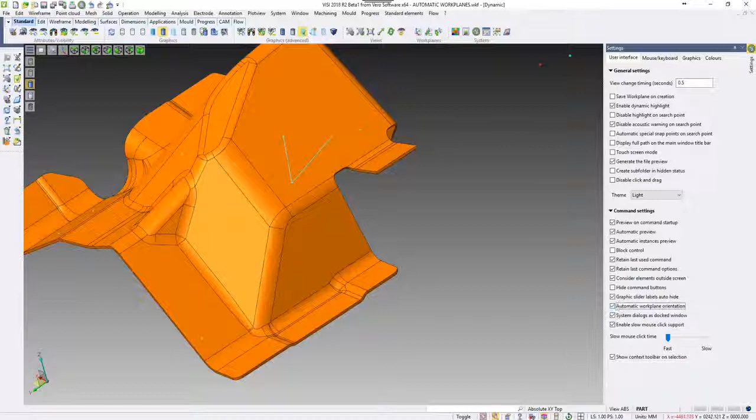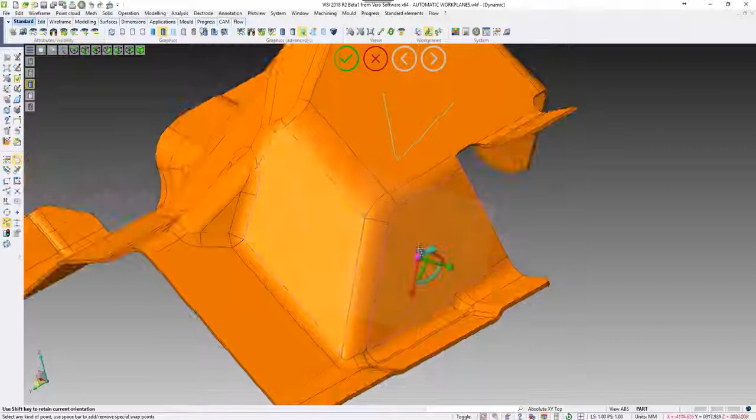So if we come and create a new work plane, you'll see as I move the cursor about, the origin will start orientating automatically depending on where I've got the cursor on the model. And if I pick on an edge of the model, you can see the x-axis snaps to follow the edge that I'm running the cursor over. And then if I place or select a point, it positions the origin.

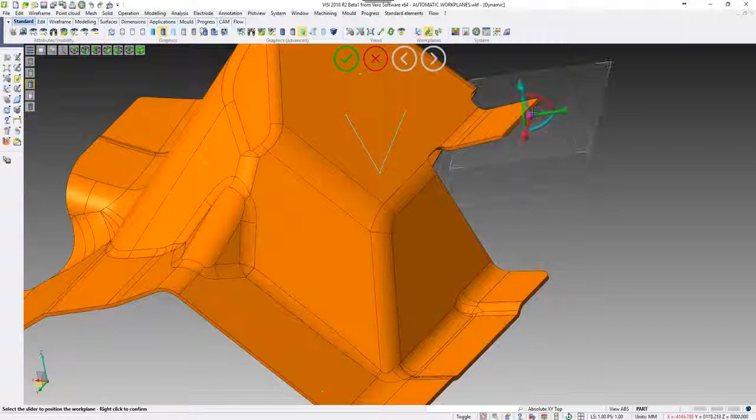I can then adjust it more by sliding the sliders, so the position sliders and the rotational sliders. So you've got a full range of adjustment there. And then if you move the cursor by dragging the center sphere to another position, you can move it to a brand new position altogether.

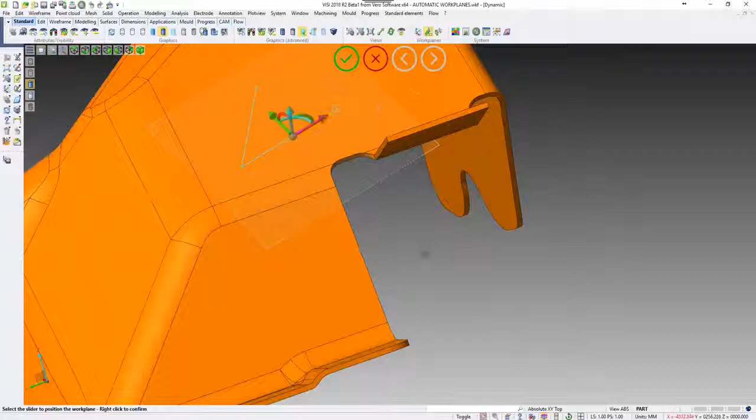So if I create a new origin, if I pick a line now that's actually on that face, you can see the X snaps to that edge. And if I press Alt and then grab one of the arrows, you can see I can actually rotate that to match a different position. So, and then move it just by dragging a slider.

So if I come over to here and create some other work planes, if I snap to an existing saved work plane, you'll see that the new automatic work plane will automatically snap to match that origin.

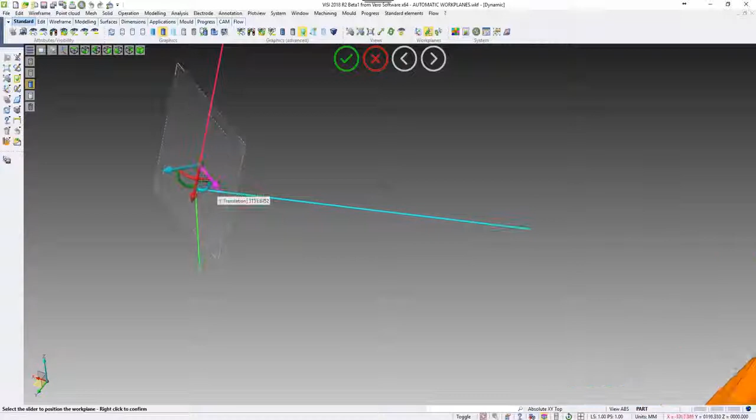Now I've got 3 lines here. What I'm going to do is create an origin to match the orientation. So I click on a line, snaps the X, but then the other origins are in the wrong position. So I'm pressing the Alt key now to be able to reorientate the X, Y and Z to match the correct orientation, and then just hit the tick, which saves that as a temporary work plane.

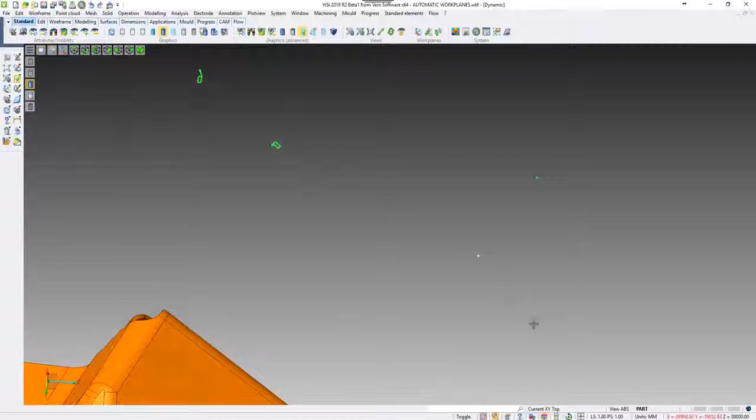So I've got 3 points now, so I've got no line elements. So the system won't automatically orientate, but if I pick on one of the points and then again use this Alt key, press the Alt key down, keep it selected, grab the arrows, and then with the Alt key selected, can just rotate them, which just locks the position of the origin, and I can match up the points and get the X, Y, Z where I want them.

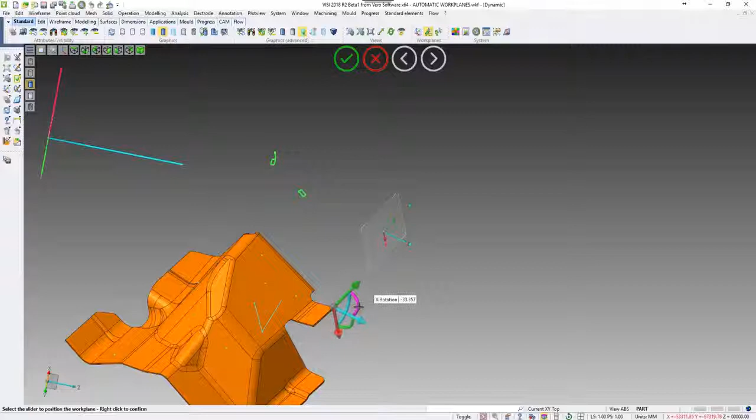And if I drag the sphere, you can see if I rotate it, it's going to rotate the origin from that anchor point. So that's creating new work planes.

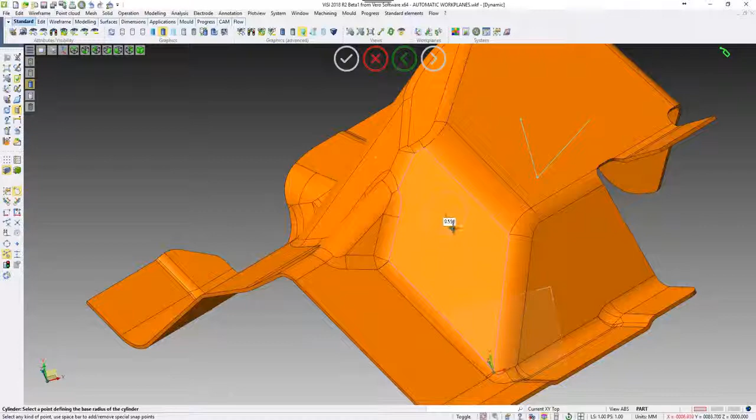This new automatic work plane also works with creating geometry also. So now what I'm going to do is create a cylinder, create some holes in this part, and you'll see there, as I move the cursor around, the origin or the work plane will snap, but it only snaps to planar faces. So I've created one hole there, which is square to the face, or normal to the face. And if I move the cursor, let the origin move, and you can see the origin moves nicely for me.

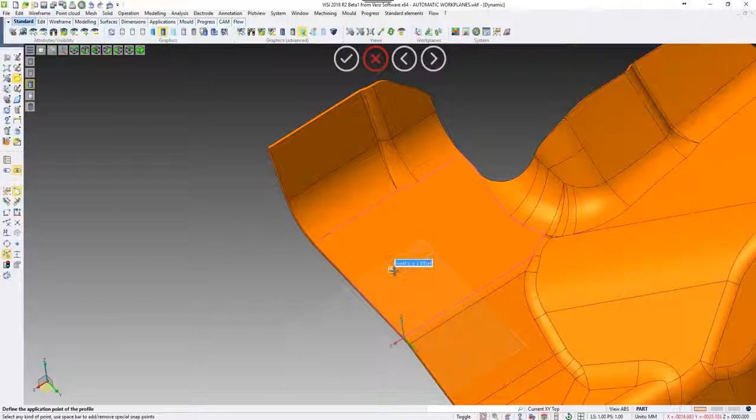It also works with 2D geometry, so I'll create a profile here. As I move the cursor, you can see the origin changes. So I'll put a slot on that face. And if I come over to this face over here, the origin moves again, and now I'm creating 2D geometry square on that face.